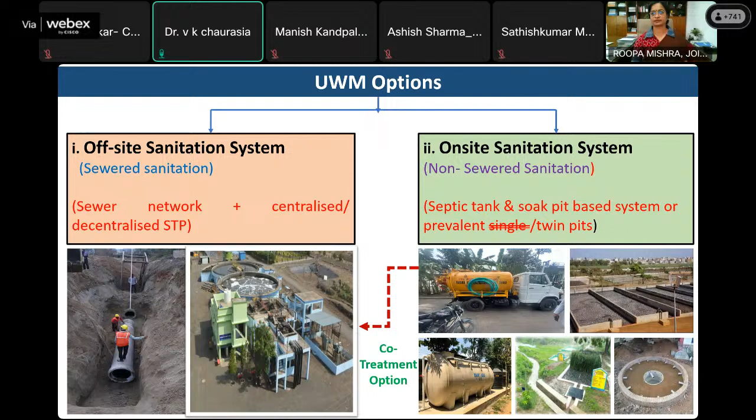Yes, thank you Chaurasia ji. Namaskar. It is indeed heartening to see that around 750 participants have joined this discussion. That shows your sincerity and commitment to take forward this very important discussion on used water management in small cities of India.

As everybody would appreciate, for almost 50, 60, 70 years we have spoken of sewage, drainage, STPs, treatment, recycling, primarily under the ambit of PHE, Public Health Engineering, which is a very strong arm of government machinery in this sector, but focusing on large cities.

So drinking water supply, drainage, and sewerage in large cities has been a focus in the nation for over five decades now. As cities are growing and the number of urban cities is growing, more small cities are becoming urban, peri-urban areas are increasing, and we cannot anymore close our eyes to small cities. So even though it is a 70-30 split, which may change as we move on, it is important that we plan and start the work of used water management right away in small cities.

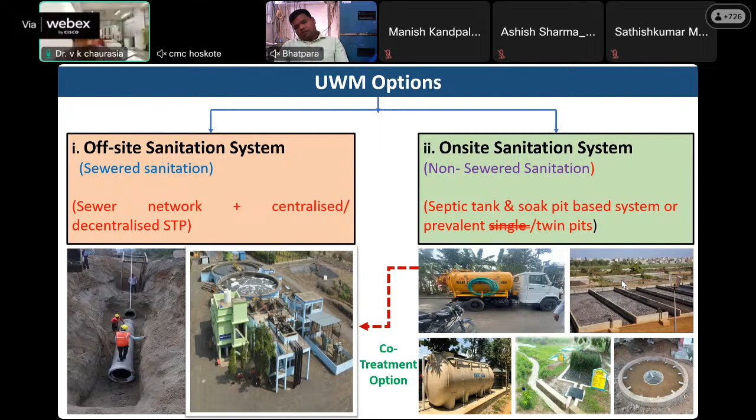I would like to share 2-3 more pieces of information. We have developed a management advisory that we are going to release after wide consultation. Apart from the type design, we have also developed for all 10 technologies available for used water management. Initially, after the NGT things came, people got confused about how to go about what technology to use. In the meantime, because of this lack of clarity, many people went for only very high-end technology, instead of technologies more suitable for smaller towns and ULBs.

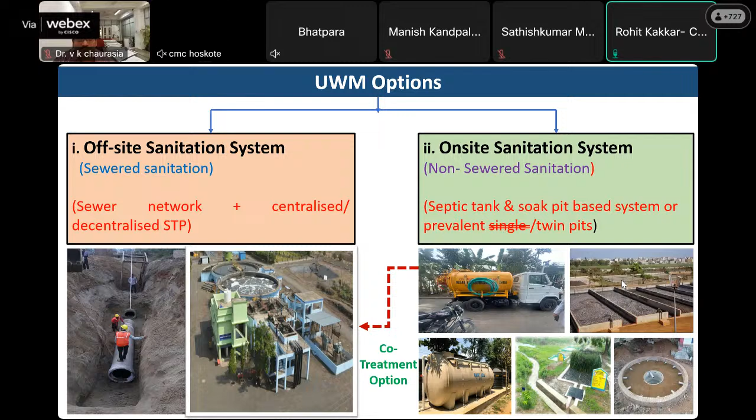As we are small, it's not that just because we have the funds available to us, we need to go in for massive projects. We need to keep a simple solution. The simple solutions are that we can have a network solution which ends up in a simple sewage treatment facility, which we'll be discussing later, or we can have an on-site sanitation system depending on the need of the place. For that the local authority has to take a call: at a certain density of population, number of dense areas, area of a town, do you want to continue with the septic tank and soak pit based system, through which pollution definitely gets into our environment and is transferred to our neighborhood? Or can we go in for a very efficient system where all this polluted wastewater is taken out to a proper treatment facility where it gets treated, and in future we can have multiple options for reuse. Next.

If we discuss the on-site system, there are generally two options. One is a holding tank made out of RCC, reinforced concrete, underground tank, but sometimes we only have an RCC base with a masonry structure to save cost. This needs to be checked by the municipal body, to ensure these privately owned septic tanks are executed as per the provisions of the IS code and generally acceptable practices, or if it's just for the sake of naming it a septic tank while any kind of structure is being built.

So this is one option: you have a septic tank, and at a periodic interval, based on the volume of the tank and the kind of usage it is subject to, you can connect the septage to a tanker. This tanker conveys it to an appropriate treatment facility, which ideally should be a sewage treatment plant in the neighborhood.

Or we can have an on-site package treatment system, which is also available now in this country at a reasonable cost, since more usage of these package treatment systems has allowed the industry to bring the cost down. This package treatment system requires some energy, but it is a full-fledged treatment plant at your own doorstep. It's slightly to considerably more costly than the septic tank, but it's available. Where septic tanks are not working efficiently and where there's willingness to pay, this could also be looked into.

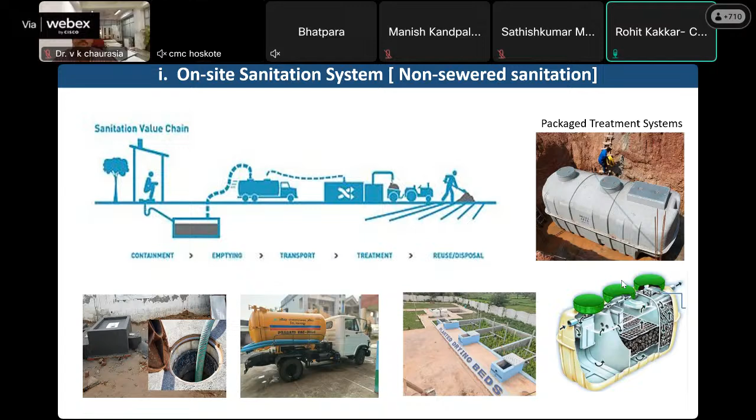Ashish, thank you. Or we can have this vehicle for sludge and septage management. As I just expressed, septage is the accumulation within the septic tank, and sludge is something which settles at the bottom of the septic tank.

So if we have to manage the sludge as well as septage, we can have this vehicle which takes the content on that particular day, comprising the bottom sludge as well as septage contained on that day, which is a very small quantity. It can convey it to the treatment plant where it can be dealt with.

But on a daily basis, septage is flowing out of the treatment facility, which is basically just a holding tank. More water you put in, more water will come out. This water going out, in case it's not treated, has almost the same characteristics as what is inside the tank. So how can we ignore this? That outlet water can flow into any drain, because even if the septic tank is very efficient and works at 50% treatment, the other 50% still gets conveyed out.

So until we have a system in place to manage this septage and effluent through a soak well system, which can safely transport it to the subsurface of the earth where it gets dispersed and safely managed, this remains a necessary component of actual or real fecal sludge and septage management.

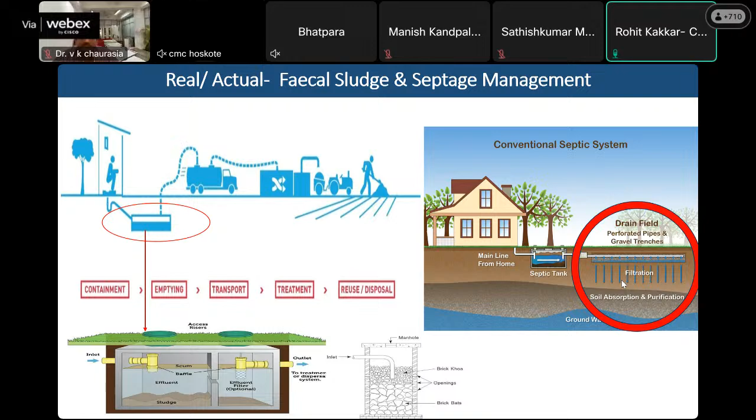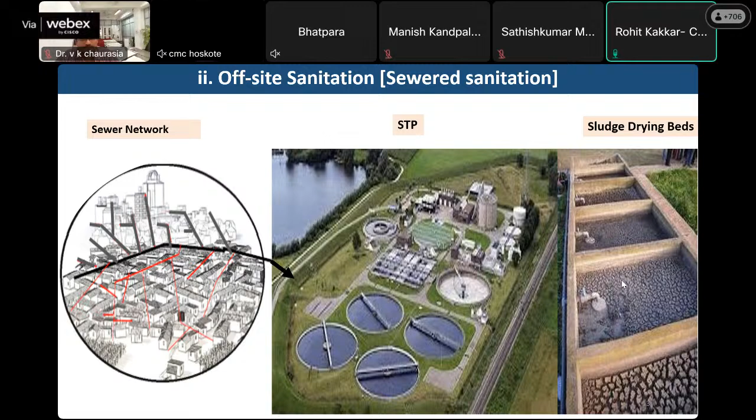We all know about the off-site sanitation system, called sewered sanitation, where the necessary houses, ranging from a certain percentage to the entire town, discharge gets collected from the house outlet of the premises itself into underground sewers, and then safely conveyed to a sewage treatment plant where the water gets fit for secondary use or discharge as needed, and the solids, which is basically sludge in the sewage, gets managed in sludge drying beds and is also available for secondary use. So this arrangement gives us assured full collection as well as full management options.

Now this is the critical part of our mission approach. Before the mission started, there was a conventional approach when we used to talk about sewer systems and sewage treatment plants. Whenever funds were made available, the aim was that we'll provide sewerage which will cover the entire town.

So if Haridwar town is there, and you give them some JICA funds or something, 100% of Haridwar town will be covered with sewer - that is the planning approach. The second approach was that we'll cater for a 30 years futuristic demand. In the 1950s and 60s, since these are major infrastructure projects, it was decided that we should have a 30-year horizon, and for that we should start creating the infrastructure today. So whenever this proposal was taken to the administrators and to finance, they would shoot it down, saying that this kind of money is not available because we had so many competing requirements - and that is one major reason we were lagging in this field in this country for so many years.

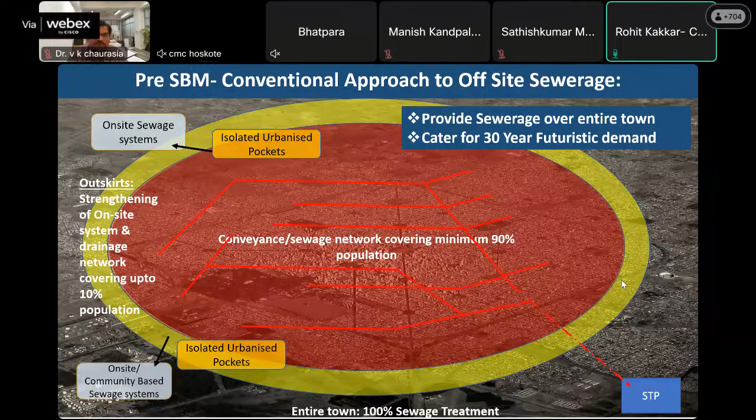But now, when the mission approach for SBM 2.0 came up, we decided to have a slightly different approach for this entire practice.

So now our approach under SBM 2.0 is that, at least in the smaller towns, we need not cover the full town - this core area concept applies between smaller towns and AMRUT towns. When we discuss a small town under Swachh Bharat Mission, with population less than 1 lakh, since the density is generally less on average, there's one core area of any town which can be of an irregular shape. It need not be a circle or a regular structure - it can be in any kind of shape, but it covers generally around 20 to 30% of the area, where 50 to 70% of your citizens would be residing.

It could be called the old area of the city, the center of the city, the commercial or market area, where congestion is there - this is called the core area. Outside the core area, the other area is called the outskirts, and further out there are fringe urbanized pockets. This is typical for any urban system with a small population - there's a small core area, and most of the outskirts are sparsely populated. Along the main roads leading outside the town, some small pockets called fringe urbanized pockets exist, with development ranging from a few tens to hundreds of houses in some localities. So this is a typical arrangement.

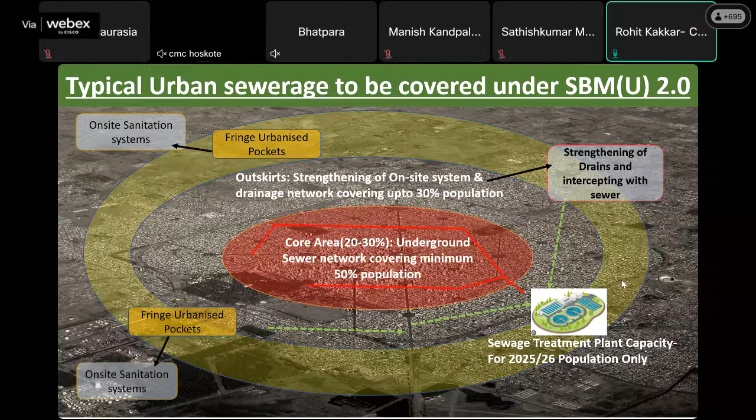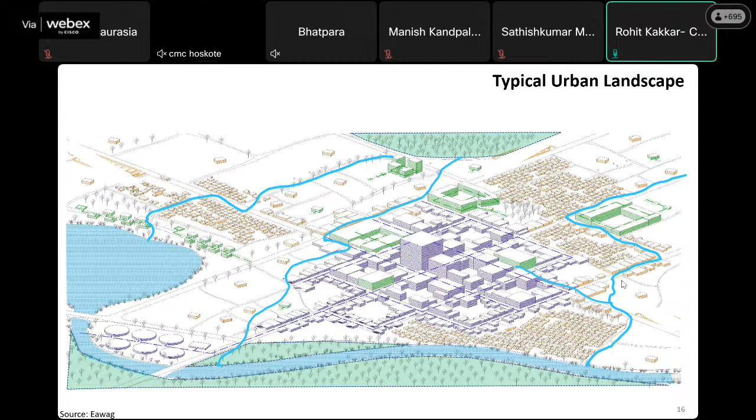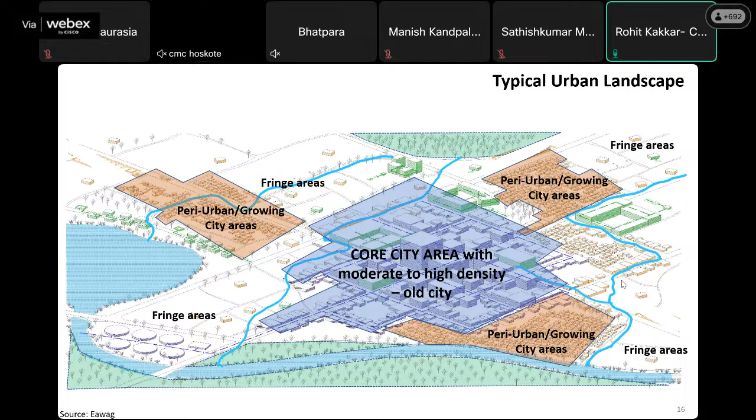This is again a typical plan of our urban landscape. You can see there is some core area of the city which has a more dense population. Then there are peri-urban or outskirts areas, and a few fringe areas just outside the town. So the core area gets a network.

These other areas, depending on population density, can have an on-site system, or there can be a system called small bore sewer system, or simplified sewer network if possible. But not all towns will need everything. Typically in a small town like what we are dealing with in our scenario, this arrangement needs to be provided for sewage treatment.

Some of this could be even a small bore system, because there could be some very congested areas with no existing arrangement, such as old city areas where people are living very close to each other, houses very close to each other.

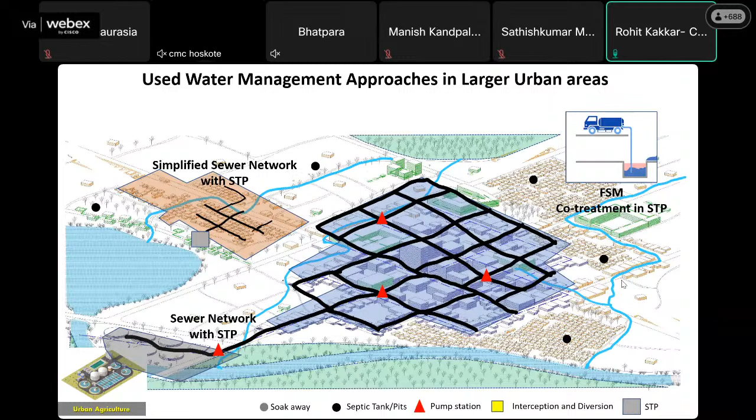There, we can also have an arrangement of a simplified sewer network, so that all our wastewater is not allowed to pollute the environment, but is taken to the sewage treatment plant from the core area where 50 to 70% of our population is residing. Next.

Now this was the theory, but what we have actually observed during implementation, in the schemes which have come to us and the SLTC meetings we have attended so far, is that there has been a claimed lack of finance with some states, which precludes them from taking up the sewer network or conveyance network. This lack of finance has been claimed despite very clear instructions and a promise between states and center that in case we set up sewage treatment plants for small towns, the networking will also come up, and 15th Finance Commission funds were also available. But still, some states have not taken up this component.

Ultimately, sometimes what happens is that in some existing schemes the STP has come up without a network, and then the nalas are getting tapped. These nalas have very low BOD, as we all know, and what will actually be treated at this STP will not be sewage, because the sewage is already lost to the environment. We are only tackling this for cosmetic requirement.

So rather than that, we should plan very properly and take up whatever is possible so that this challenge gets offset and funding is available, like we said, under the 15th Finance Commission. If you have absolutely no money, you can try to justify it and take funds from the Urban Infrastructure Development Fund. But do start looking into this requirement, at least for class 2 and 3 towns, the larger SBM towns.

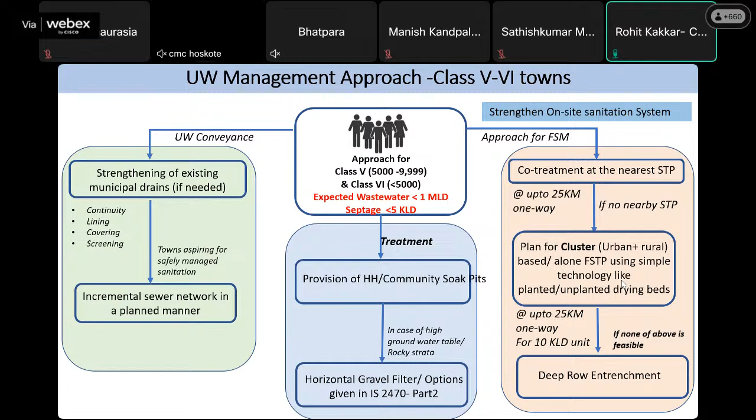But if there is no nearby STP, a few small towns, or even a bigger town along with small towns, can plan a cluster with a small FSTP taking up at least a 10 KLD unit, for some economy of scale. Other towns can transport their septage - one truck load per day or even less, since if total discharge is less than 5 KLD it's just one tractor load per day - to this cluster FSTP. And if you are a totally isolated town and nothing else is feasible, and your quantity is still small, a system of deep row entrenchment will be the most beneficial system for such a town. Next.

Now for a slightly bigger town where the load is 2 MLD, or a 10 KLD FSTP, you can have the same system, but there needs to be some plan for a future network arrangement. For treatment, there are various cost-effective options available, like the waste stabilization pond, aerated lagoon, or the anaerobic baffled reactor.

Dr. Chaurasia in his presentation may be covering this. There is also a booklet recently published that will give you these options, so please note these possibilities rather than going for something very expensive and unusual just because somebody tells you it can be done - for your kind of town, this simpler system is absolutely proper, and the same goes for FSM. Just go through this, I'll try to hurry up. Next.

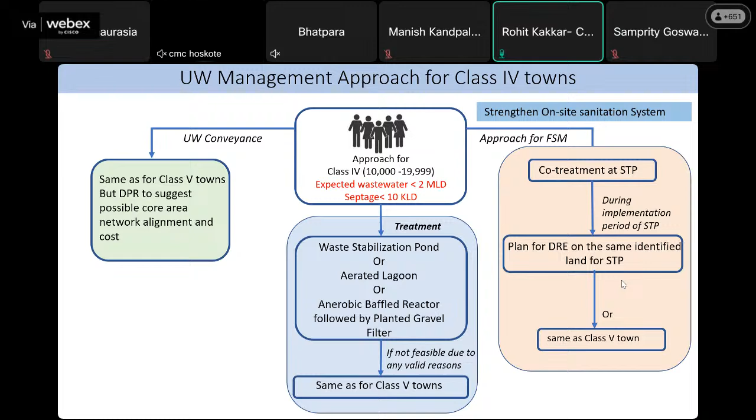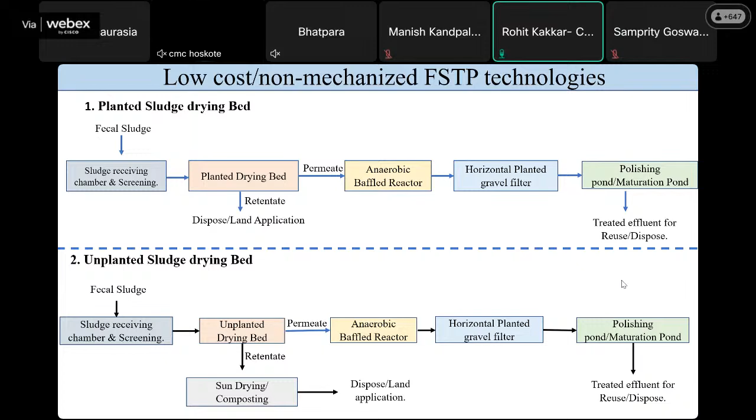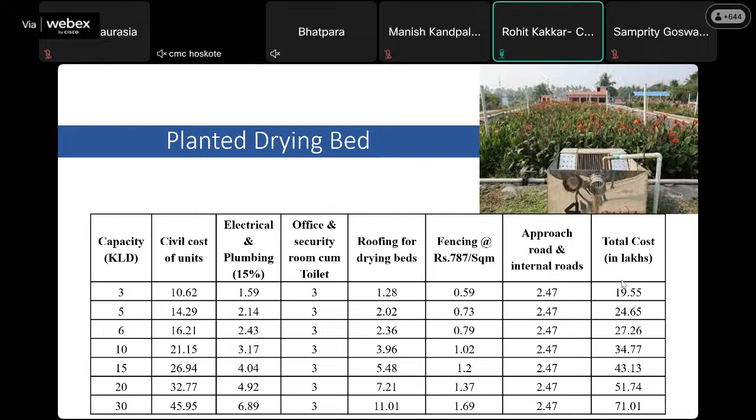Quickly moving forward, this is all. You can have a look in the document, and we can proceed.

The second document is a type design for sewage treatment, a big effort undertaken by Dr. Chaurasia, and it is something very unique. There's a document coming up which will give a complete techno-economic study on various options suitable for an urban small to medium town, ideally placed for the SBM 2.0 requirement, because we have a limited kitty of funds. We need not go for something which is totally out of our budget. It gives the capex, opex, area needed for various treatment facilities, the life cycle cost assessment, and what should be a type design of a sewage treatment plant. We will have a look at it when we actually release this. This is in the final stages of release and will be shared with you shortly.

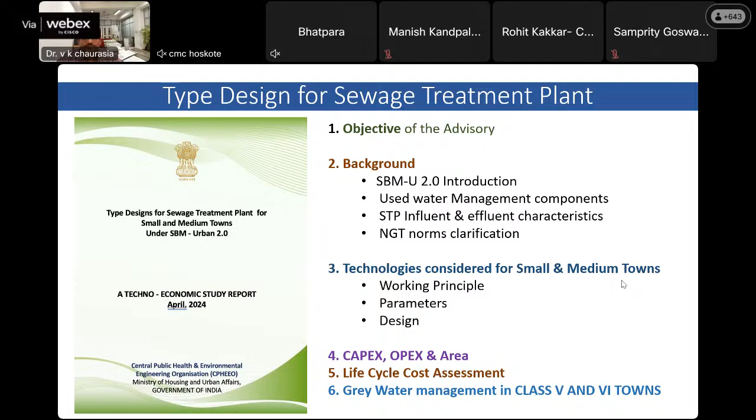There's so much to be explained, but these are the 8 systems which have been cleared. WSP is the waste stabilization pond, anaerobic baffled reactor with the constructed wetland. TF is the trickling filter, an old technology which is again being revived. We have had a look at one of the places, also modernly called bio tower, because now you have plastic arrangements which are modular. UASB is upflow anaerobic sludge blanket with a waste stabilization pond, again a very good time-proven technology for wastewater management if we have space.

Then the UASB with the activated sludge process, again something totally generic across the world. Most sewage treatment plants, even in the most developed nations, have the basic activated sludge process, so there's no need for us to think of something more costly. But there are some systems which are equivalently efficient, and in case you can get them at a reasonable cost, you can use MBBR or SBR also. These technologies have been discussed in this document so that we should be aware of what is available in the market and what should be a reasonable expenditure on such things.

Again, we have one for these. What should be the system to be put in place in case there is a cost to the land? It's a two-way matrix kind of system that this document tells you. Once you have a look at it, you will all be benefited, because the matrix will tell you in case the land is costly, what small footprint systems can be put in place, and in case the land is less costly, what less cost-intensive, less life cycle cost systems will be put in place.

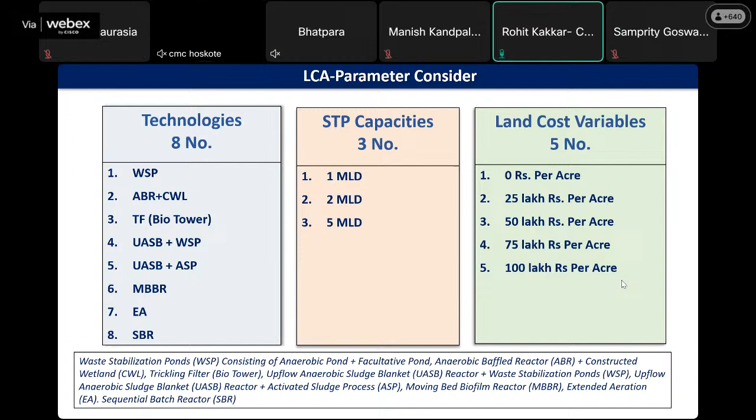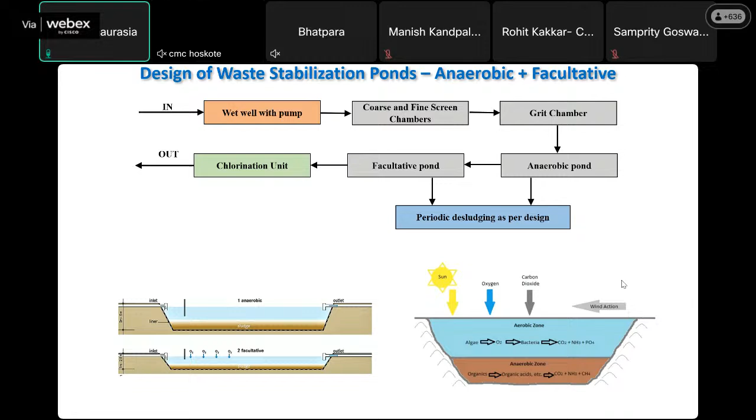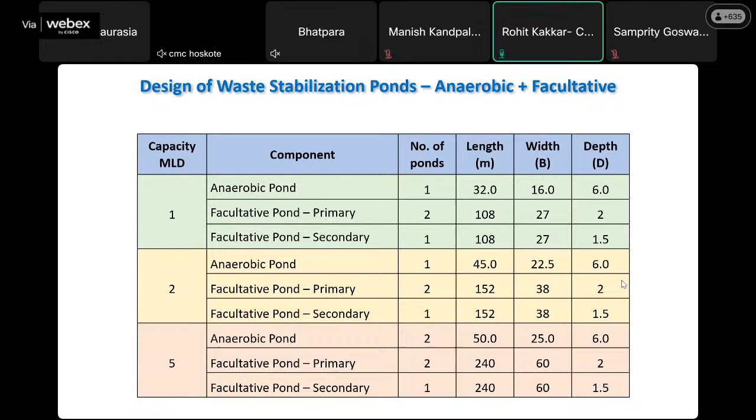All designs have been discussed in detail in the document. We will separately present these details in a separate session. Just to give a glimpse, a lot of effort has been put into this document, and you will all be benefited by this. I don't like to discuss the cost here, but everything has been worked out so that you can make a very intelligent call on such systems.

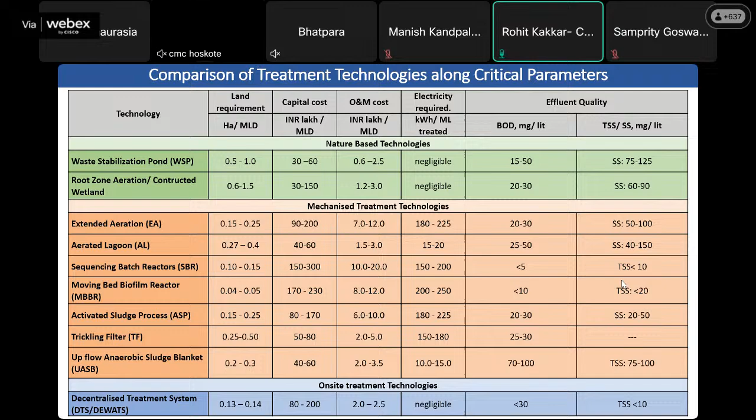Coming to the end of my presentation, take a moment to consider that the UN monitors all countries in the world for safely managed sanitation, and they have come up with certain norms. Through their local body, which is WHO and UNICEF in India, they are also preparing a report on India's performance, which last year gave us a very poor number.

You should take a look at this particular slide: they say that in case you have got a sewer network and it is taken to a treatment plant, even if it is only up to secondary treatment, then it is called compliant. But in case you have an on-site system, it needs to have a soak pit, only then will it be considered compliant. Something intermediate you do not have, and the septic tank content is also taken to a treatment plant. This same approach is being practiced by CPHEEO as well as in the guidelines for the Swachh Bharat Mission 2.0. We request you to limit yourself to this globally acceptable ethos for wastewater, rather than getting into any other practice which may seem okay for the moment, but ultimately will not be as per the requirement. It will be a wasteful expenditure. This is what we wanted to make clear with this.

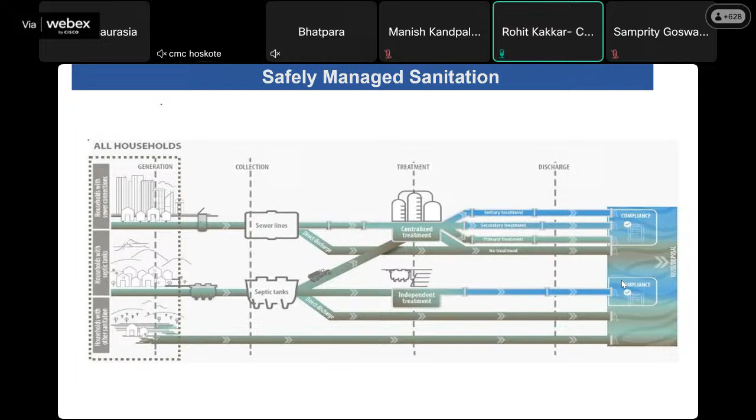Thank you very much. You have explained various aspects, keeping in mind that many new ULBs which are entering the implementation phase need that orientation. Apart from that, many private consultants preparing DPRs have also joined, so it was essential. Although those who are very much aware about SBM may feel some things are repetitive, for the sake of others, and since we are entering the implementation stage, we thought it fit to remind and explain once, so that the approach is broadly aligned, whether it is a private consultant, new ULB officials, or whosoever has come after transfer.

Apart from the approach that has been mentioned, another important thing, and I will say it is an impediment in faster implementation, is the selection of technology. Often because of standards, there is confusion about which standard we should take, and according to that standard, which technology we should select. This has been one challenge with ULBs, since in many cases they don't have complete know-how, and sometimes there is confusion because of all their other duties.

They often rely on whatever advice they are getting, and in the process, they often end up with a technology which is not suited to their given population size, revenue size, or technical skill level. Because of that, even after construction, when it is ready and commissioned, it often helps only to satisfy regulatory requirements and visits. But when it comes to actually operating in the field and treating the used water for which all this effort has been done, it often turns out to be unsustainable in many cases, and in a few cases people even bypass it.

Mr. Rohit has already explained what options may exist for different classes of cities, and that we have developed. Let's go to the next slide. We have developed this keeping in view many states' constraints, so a wide level of flexibility is there. It is not changing, yes.

One thing that often comes up is that whosoever is preparing the DPR, because of the information they have, will say that this is NGT norm we have to follow, and accordingly only one or two technologies meet the requirements. So they will put just one in the DPR, and at the ULB level, or sometimes even at the state level, that level of competence or guidance is not there, so they go ahead with that. Then in a given set of conditions, if our approach is not right, we will end up somewhere that doesn't meet our objective.

Let me give an example. I have listed some 2-3 examples, which I will come to. If we select a technology that is cost intensive, both capex and opex wise, whatever SBM fund is there, plus the matching state share, either from their own sources or from the 15th Finance Commission or other sources, will all go toward this. So naturally there will be no fund left for, let's say, network laying. Another issue that comes up is that you are providing only for treatment, and there is no money for the network.

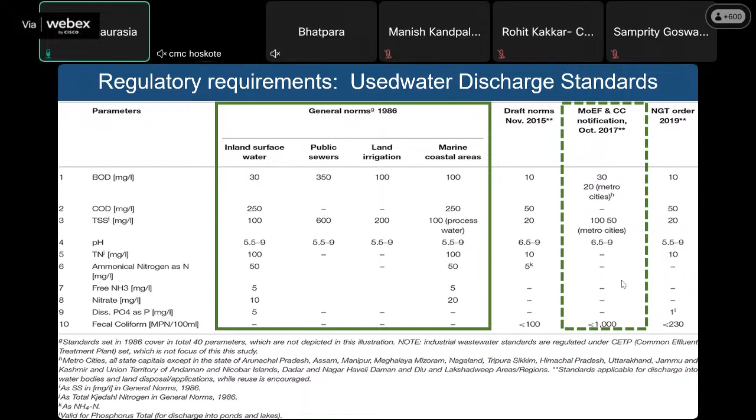Earlier they had said the condition was that after treatment nothing will go to the water body which is being polluted; it has to be utilized somewhere else. But later they realized that in all cases it may not be possible, so they re-notified this, and it is now very clear that you have to follow whatever provisions are in the Act.

I am bringing this up because many states, when we discuss, everybody tells me to give it in writing so they can tell their people. But giving that writing, the certain level of responsibility I am enjoying, I am publicly presenting and telling you - take this clue and take it up with your state government and state pollution control board, rather than waiting for everything to be given in writing before you implement it. It is a joint effort. You also come forward, and wherever required I am there, because we are taking the lead and will support that.

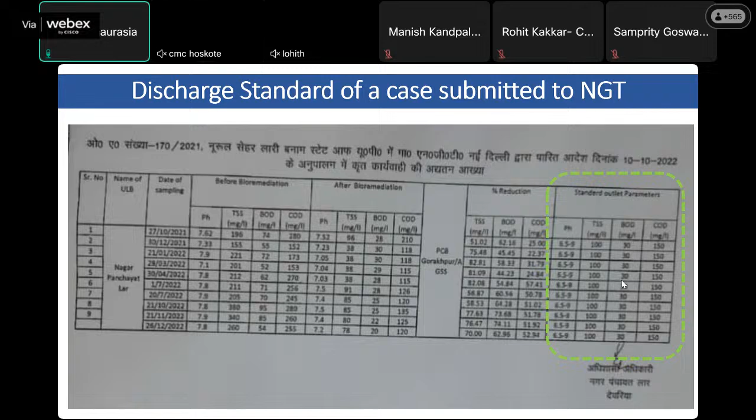Why am I repeatedly emphasizing this? Because a lot of confusion is there, and cost intensive proposals and DPRs are being prepared, which is derailing the whole thing. If we address this problem in a simple manner, it is doable, and I will explain. This will expedite and help us meet our target within the mission period with very little cost, rather than the confusion that has been there. Sewer TP requires a lot of cost, a lot of inconvenience. This may be true in some larger cities, but smaller cities it is as simple as I will explain. You just see in the next slide.

These are some of the things I want to share: the regulatory authority is preparing comprehensive liquid waste management rules, where fecal sludge treatment alone will not be sufficient. Responsibility is being fixed for each and every generator to department. Apart from that, for various standards, our ministry has also written to different ministries, and we are following up, and CPCB guidelines for reuse and biosolids, meaning sludge, are also under preparation. So this whole ecosystem we are working on, and these things will be with you very quickly with rationalized standards.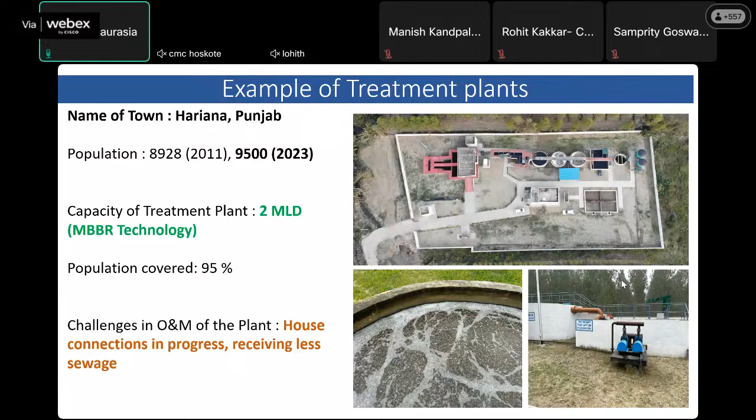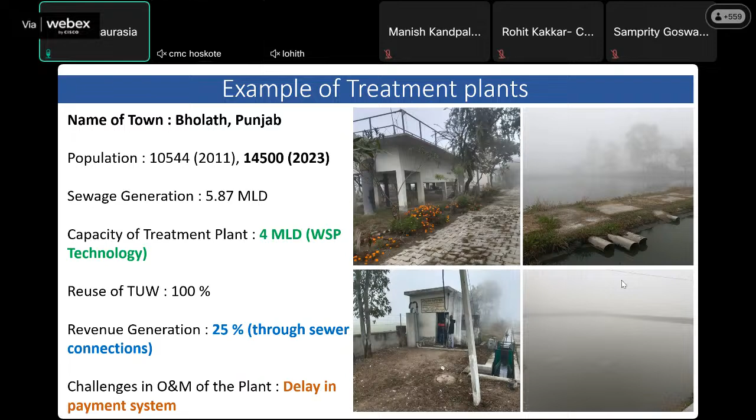Some people may be saying CPHEO has gone backward, thinking waste stabilization ponds were from 40 years back. 40 years back, in places like Jabalpur, it started when their population was 10 lakh, 20 lakh, then waste stabilization started. Now they have gone mechanized, so we cannot go for that in towns of 10,000, 20,000, 30,000 population. What is doable and significantly treating also - this aspect should be kept in mind.

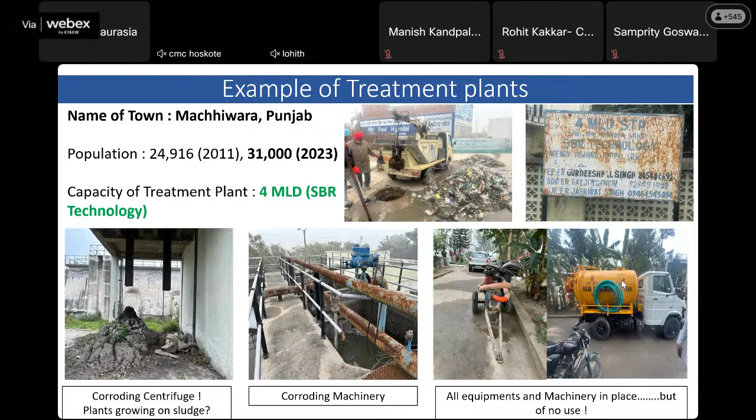Some of the major observations we have found are oversized STPs and high technology infrastructure. Among many 64 DPRs we have examined across states, we found these are the common sort of deficiencies where we need to handhold and build capacity of those who are preparing them - stringent NGT effluent norms, and details like I&D are missing.

One or two examples I would give. In all 64 we examined, various types of problems are there - just to highlight, otherwise many projects in UP are also good, Maharashtra is also good, but we want to quickly point out what problems are coming in the DPRs prepared - table of content, figures, page numbering, drawings, and technology proposal are sometimes missing, which makes it difficult to review. This is the reason we want to standardize, as Mr. Rohit mentioned. We are bringing a standard content and checklist for DPRs, which will be examined at state level, standardizing DPRs and allowing faster approval at SLTC.

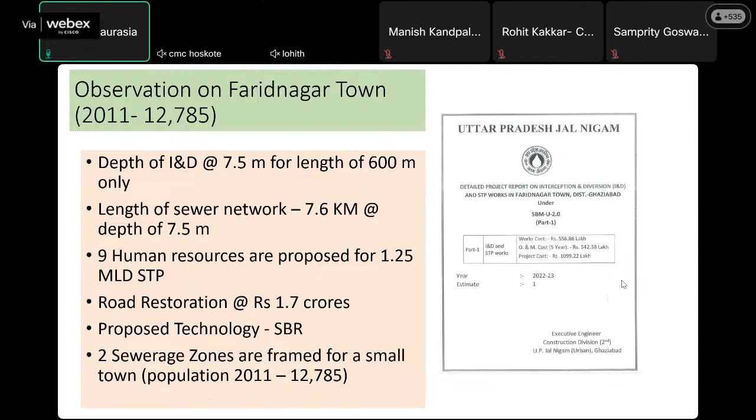Go to next slide. Yes, this is another example.

Here we want to highlight that for a 1.4 kilometer sewer line, 53 manholes have been proposed. That sort of thing should not be there - things should be done properly.

Come to the next one, quickly move ahead.

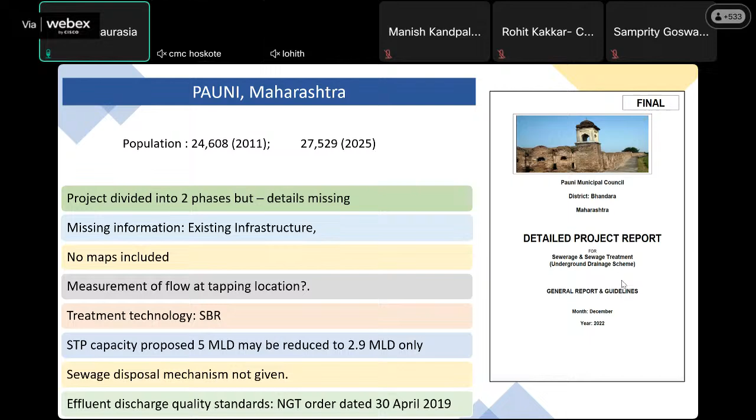This Pauni case also has similar problems. As I explained, this pattern in Maharashtra and other states may be similar. Here, over-design of 5 MLD, 6 MLD is proposed for the next 30 years, while the requirement is only 2.9. The network is not in place, so flow will be even less. Why create infrastructure that is never utilized in its lifetime? These things have to be kept in mind.

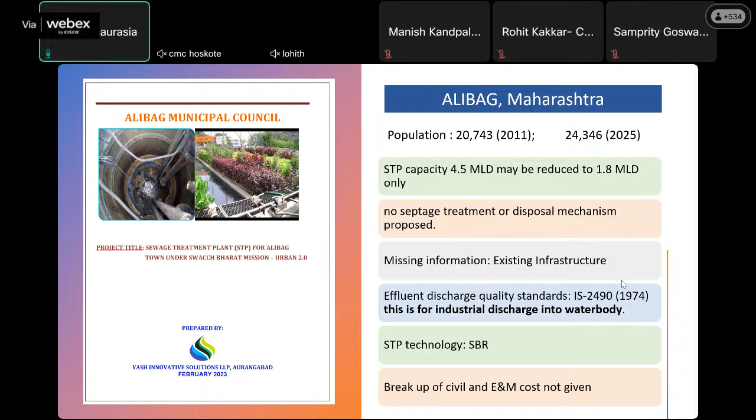Similar sort, 1.8 MLD की जगह 4.5 MLD they have proposed, and discharge standard again, I am telling, capacity everywhere. Don't know what type of threat or fear is there. They are going for mechanized plant which is designed to fail for smaller towns. Even if it is made to run and successfully operate, huge amounts have to be spent, which the ULB could be spending in other ways. That sort of thing should be avoided.

JS was very clearly mentioning that holistic planning should be achieved incrementally and over a long period of time. That approach should be followed. These are the things that we are going to standardize. It is ready, we will be sharing at any point of time, we will upload it on our website and also share with you all.

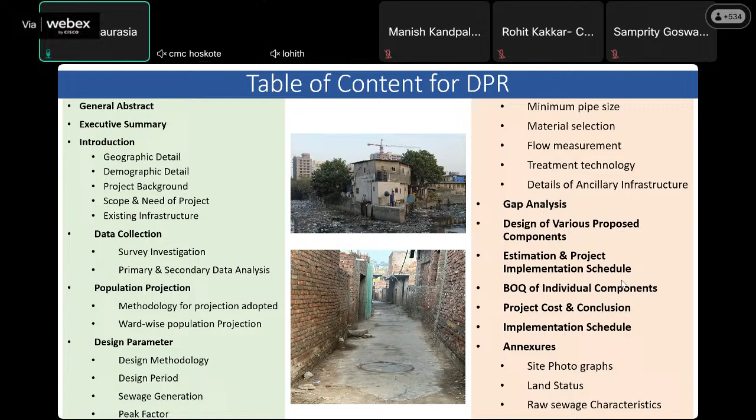Go to the next one. These chapters, every heading we have covered so that nothing is left out. And one or two, or maybe four or five DPRs that have been finalized with various state governments, they look like model DPRs.

That also we will share and upload on the ministry website. Some general suggestions: nature-based, less mechanized technology to be adopted. Solar pumping and other arrangements should be made so that O&M cost is less, electricity-wise. Centrifuge in many cases should be avoided because they have large capacity, it is fit only for that; for smaller plants it is not fit.

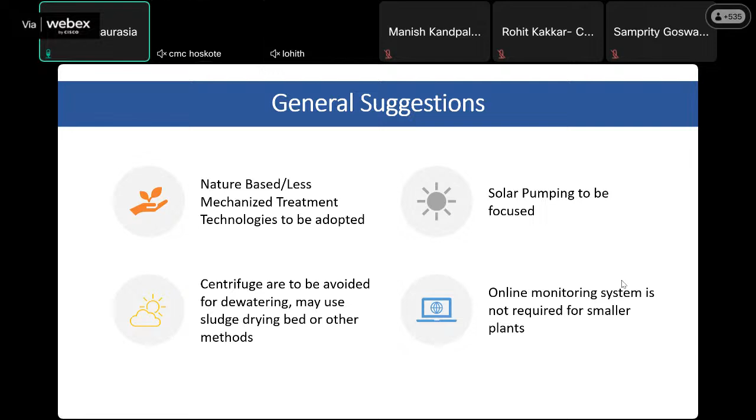Go to next one please. These are some procurement standards that we have already examined - 16 documents, 7 states. The main things coming up are bidding capacity, type of bid, validity, and implementation. These are the things that are common and good.

But other points where shortcomings are there: relevant SOR is not mentioned, site location map is not there, state region basis discrimination is there. Let's say for Northeast, if they mention our sewer network Northeast should have done, not a single player will be there. So in that case we have to be open and invite, such restrictive things should not be there. General condition of contract, special condition of contract, and this RA and sewage, all these things should be properly mentioned.

Keep on moving. These are other things - GST inclusive or not, complete built-up drawing, site visit, all these things should be taken. We have already developed a model tender document, bid document, this we are going to share. It is for treatment plant 1 to 5 MLD and also on cluster basis 1 to 5. Apart from that, I&D and STP, that is also ready, so very quickly after approval we are going to share that.

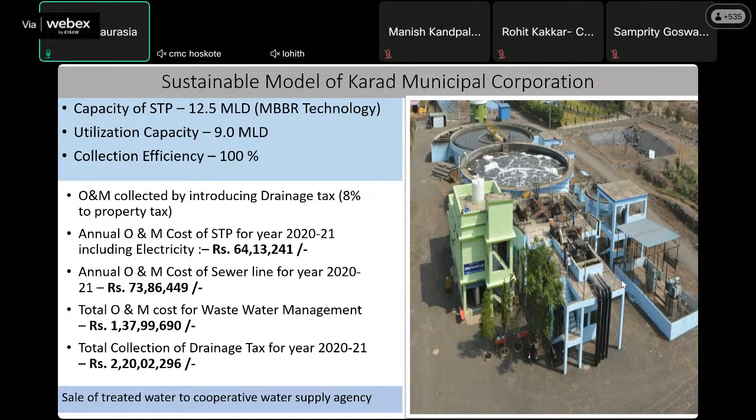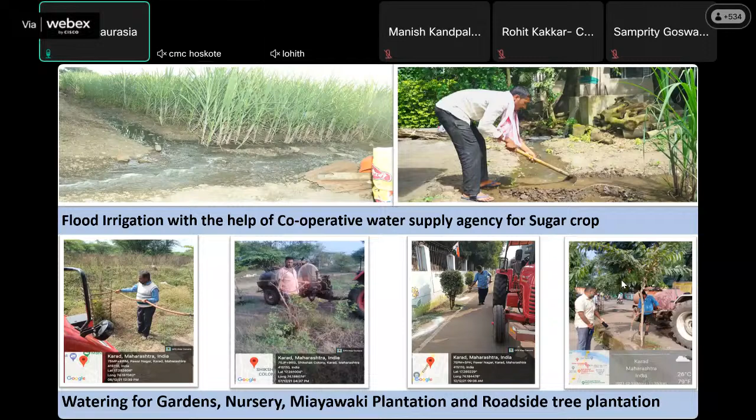Near our towns, alongside agricultural land, with very little expenditure we can lay pipelines and pump water, so stored water will be available. This improves O&M costs, and whatever treated sewage is available, they use for different purposes like flood irrigation, even washing roads and streets, working in a true spirit of circularity, emphasizing vehicle washing and other uses.

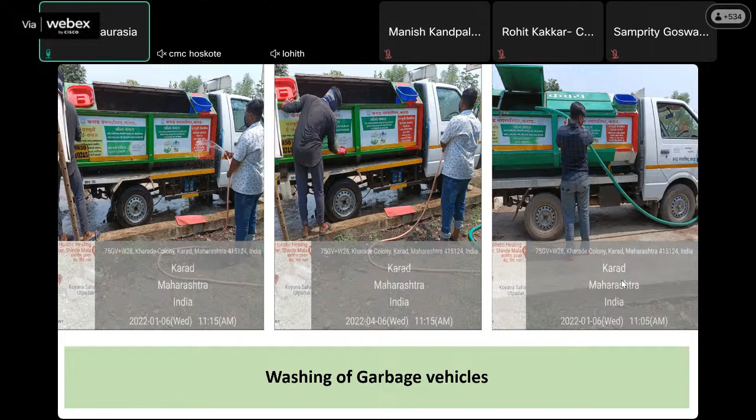Keep on moving. Yes, please. Yes, move, please. This washing up footpath and other, move, keep on moving. Yes.

These two things are very important. Again, these cases have been referred to the Honorable NGT, and some orders have also been passed.

Even in Haryana, there's a town called Sirsi with a population of 2,400 - it's really just a village, smaller than our smallest town. They built this for 30 lakh at some point, and through pisciculture, they are leasing out the pond for fishing, earning 50,000 per annum.

So for such plants, where no technical, mechanical or other inputs are required, the earnings from fishing in the maturation pond are enough to suffice - nothing more is needed. So all our smaller towns, less than 20,000 population, can think of similar things. They are essentially urbanized villages, not more than that.

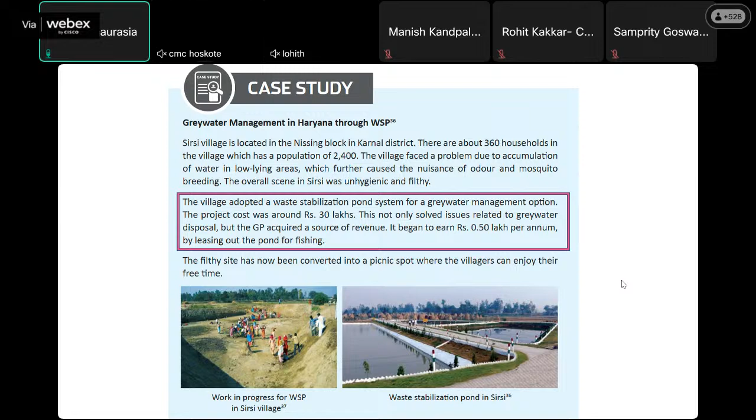Next one - this is the Kurak Jagir plan, where there's a series of waste stabilization ponds. Once dried, they remove the sludge, and it meets the BOD norms of 30, 31, and so on. Here too, they can do fishing and similar activities.

So what we want to emphasize is that initially, let it be this way. Before explaining further, let me give the example of Haryana. Around 1998-2000, they started this, and even in Punjab, most cities adopted waste stabilization, UASB, aerated lagoons, and similar technologies.

But now, after 20-25 years, as acceptability has grown, ULB finances have improved, technical capacity exists, and reuse requirements are there, they are upgrading to mechanized systems. But if we start mechanizing all ULBs in one go, that won't be successful. In many cases, it will take 7, 8, or 10 years to develop all these things.

Another question that comes up is where is land available for waste stabilization and similar approaches? If land is not available, then whatever is readily available, we will mechanize.

I would suggest that for a 1 MLD plant in a small town of 10,000 population, if you propose an SBR, the cost is 3 crore. Rather than spending 3 crore on 1 MLD plus a similar amount over the next 5 years on O&M, spend 1.5 crore on purchasing land - you can easily get 6 to 7.5 acres of land. Then, with 1.5 crore, you can build a waste stabilization pond or similar technology.

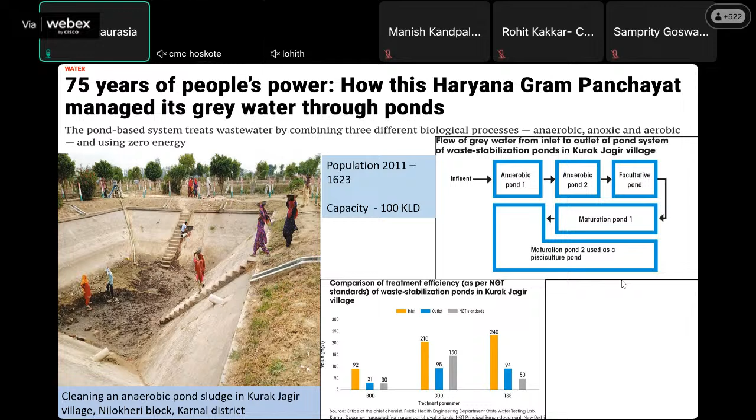Sorry, we have taken slightly more time and we are running late, but I hope the states will realize we want to explain in great detail to all those who have joined, so that we can effectively communicate and align and standardize things. From time to time, we keep taking your view and we change our view where we find it aligns and suits our various ULBs. Thank you very much.

Now I request, I think it is a state's thing. So state-wise, Rohitji, maybe you can take one state at a time, 4-5 minutes each, on standardized experiences and challenges, so we can note them down for each state and combine them for all states. Over to Rohitji.

In between council states, let us invite, let's say we invite from Maharashtra, Mr. Manish Chaudhary. Please bring up their presentation quickly.

Yes, Maheshji, are you able to hear us? Yes sir, yes sir, voice is coming through. Yes please, share your experiences and suggest what we should do so that implementation happens faster, whatever the objective JS mentioned. Thank you, please go ahead.

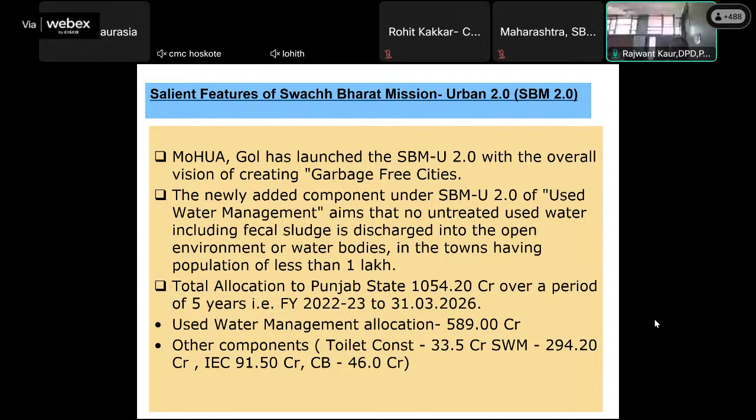20 works have been allotted amounting to rupees 204.86 crores. Sir, for these allotted works, reuse of treated used water proposals have been prepared for all 56 towns amounting to rupees 87 crores, but they are yet to be approved.

Excellent, ma'am. It is really heartening to see that out of 56 projects sanctioned, 54 are already in various stages of tendering and work allotment, and proposals for reuse of treated water are also there. We will be learning a lot from your state and sharing with others. At some point, if anybody is willing, we will request to come and see how Punjab is managing - it will help understand how to sustainably implement and manage.

If you have any issue, that's fine, otherwise you will go ahead.

Out of 20 works, one work has 95% completion progress. Other works are also in progress, nearly 2 to 20% in between. Thank you, ma'am, very nice, congrats.

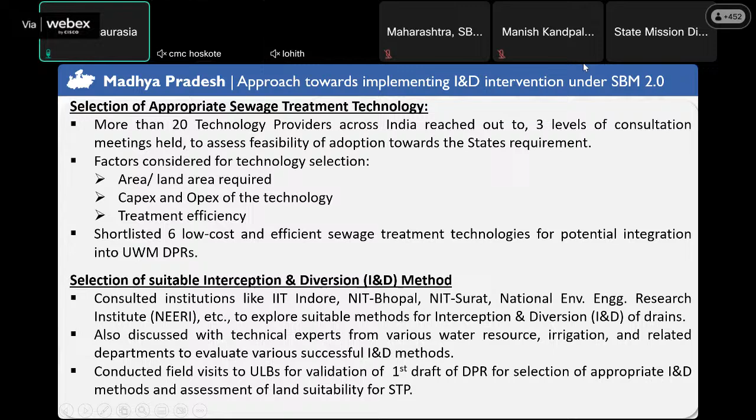Thank you very much, we have noted that point, and we will be in touch, especially regarding O&M and other requirements. We will definitely see in what way it is possible to help, but that point has been noted. And regarding the industrial towns, please send a letter, we will definitely see and then be able to tell you. Please go ahead.

Definitely sir, next Tamil Nadu, Arjun, next Tamil Nadu. Thank you sir, we'll be in touch. Our team will be in touch, and these 3-4 points we have noted down. We will be back to you.

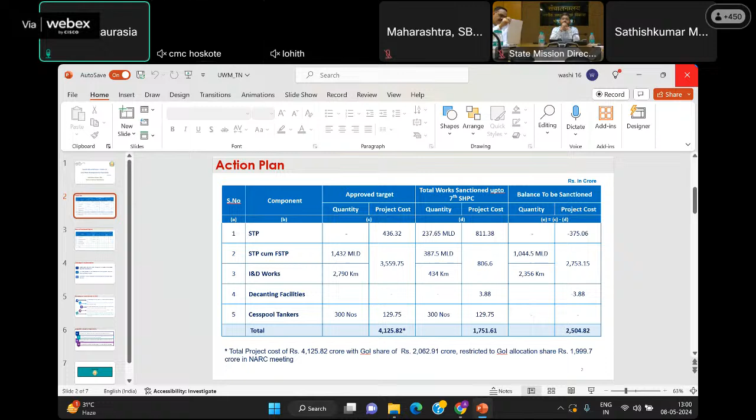Thank you, Madhya Pradesh. Now Tamil Nadu. Is anybody available from Tamil Nadu? Their JCM is there sir, but he is not speaking. So in between, try to contact them, and then call UP. Call UP, remove Tamil Nadu for now. Call UP.

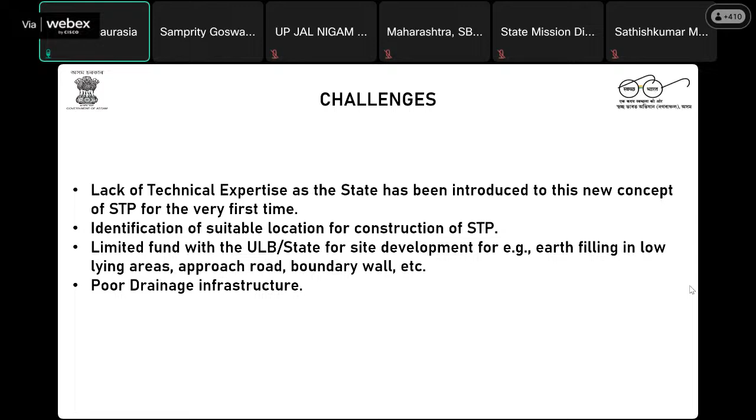Sir, good afternoon, sir. Sorry, there was a technical glitch, so we could not join earlier, sir. No, welcome. After a long time we are able to see each other because frequently we used to meet. But anyway, I hope you people are busy in implementing. Please share that. Thank you. Yes, sir. Thank you, sir.

I would like to thank CPHEEO, sir, for coming out with these type designs and advisory for technology. I think it was long due. It will be very useful for the ULB, sir. And...

So moving forward, sir, the action plan for Tamil Nadu was approved for 4,125 crores, sir. Out of which we have sanctioned projects till the 7th SHPC for 1,751 crores. So around 2,504 crores of projects are yet to be sanctioned, sir. The major projects yet to be sanctioned are basically STP cum FSTP plants, with I&D works. I will come to those works in the next slide, please. Next.

Right now we have from SBM 2.0 around 15 STP plants with the UGD network, where the UGSS component is being contributed through other schemes from the state government or externally aided projects. These are the bigger projects. So in these projects, only the pumping main and the STP we have tied up from SBM 2.0. Out of this, all 15 projects are going to be launched in June itself. The tenders are almost finalized. Because of the MCC only, we are waiting to give the final work order. Then STP cum FSTP, 12 works are already ongoing, sir.

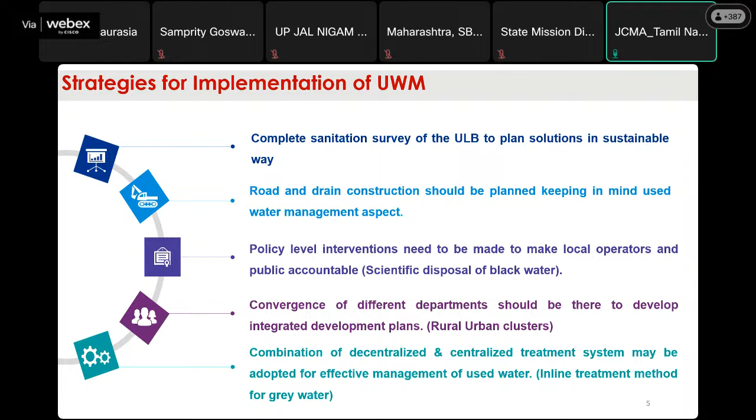Apart from that, as suggested, we are going for convergence of rural and urban clusters for black water management. We are also regularly registering all the local operators and trying to fix GPS in their vehicles so that cities are ODF plus, and no untreated water is let out into the water bodies, which is the motive of the mission. Thank you, sir.

One point I would like to respond to quickly regarding this sewer network. Two options - one, within the available fund, the simplified way I mentioned, where after saving something from the treatment portion, that can be utilized for network. This is already allowed in certain states where their state share was in excess and they have already covered sewer network - we allowed them to cover that sewer network also. So that is one thing.

Regarding this funding for less than 30,000, you should have heard what JS was mentioning, that holistic planning is required, and whatever fund comes can be implemented in stages. This being top priority of Government of India, states and ULBs, we are also trying at our level that at some point this network funding also comes. So in the planning stage, provision should be kept in such a way that one component I am constructing today, if more funding comes tomorrow, that will also be available. Let us hope, and you people keep posing your requirements and other things at different levels, and we hope that at some point similar support will also be available. In the meanwhile, whatever is available, some portion saved out of, let us say, treatment, that can be utilized for core network also.

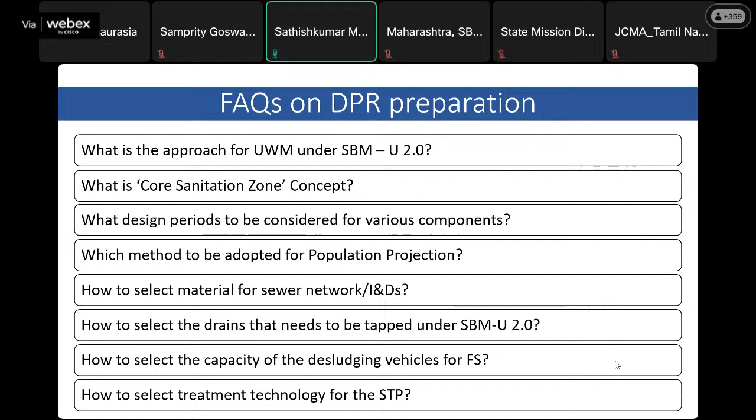Yes sir, next slide. Just one point here: the treatment technology, once again, has been emphasized again and again during the presentation. It has to be chosen very cautiously. For smaller cities, you go for nature-based technologies like waste stabilization ponds.

For medium cities, that is class 3 cities, you can go for less mechanized processes like UASB and ASP. Whereas for class 2 towns, you can go for sophisticated technologies like MBBR, but most cities are taking SBR. The problem with SBR is that it requires more land than MBBR, and its operation and maintenance cost is also very high. So that has to be taken into consideration. But overall, ASP and UASB combinations of these two technologies work very well, so you can consider it for class 2 towns also.

Next slide please. Here the important point is that most states are still proposing standalone FSTPs, either with their own funds or from other funds. So in this case, co-treatment is an ideal thing.

There are two reasons I would point out here. One, the fecal sludge by its nature is intermittent due to various reasons, so a standalone FSTP will not be economically viable. Second, in the Indian context, the BOD level is very low compared to the design BOD of your STPs. So if you segregate your fecal sludge from your used water, it will hamper the function of your STPs. Adding that fecal sludge into your used water treatment systems will actually have a beneficial effect, so it is ideal to co-treat your fecal sludge in the STPs.